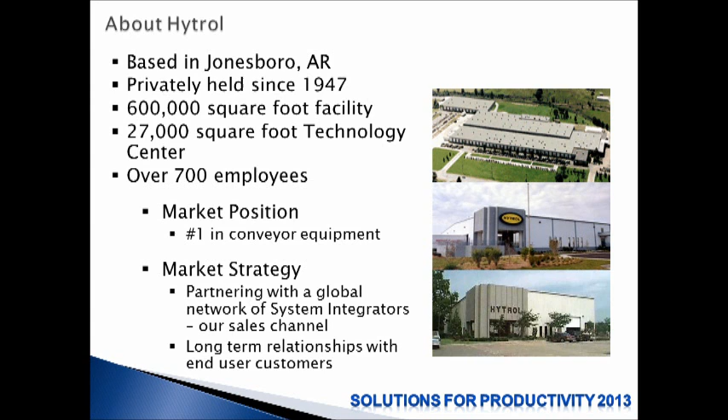And just a little bit about Hytrol Conveyor Company. I've been with Hytrol for 28 years, and we're actually the largest conveyor manufacturer in North America. We're located in Northeast Arkansas. We're actually number one as far as the amount of conveyor equipment that we manufacture. And we go to market through partnering with integration partners throughout the world. And obviously McCombs-Wall is our integration partner in this area. And we do have long-term relationships with end users.

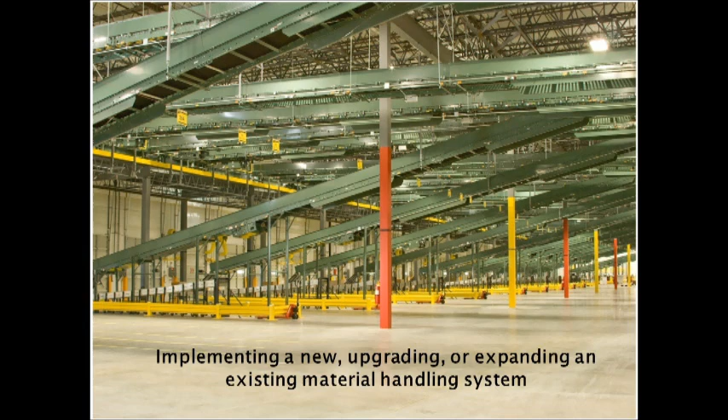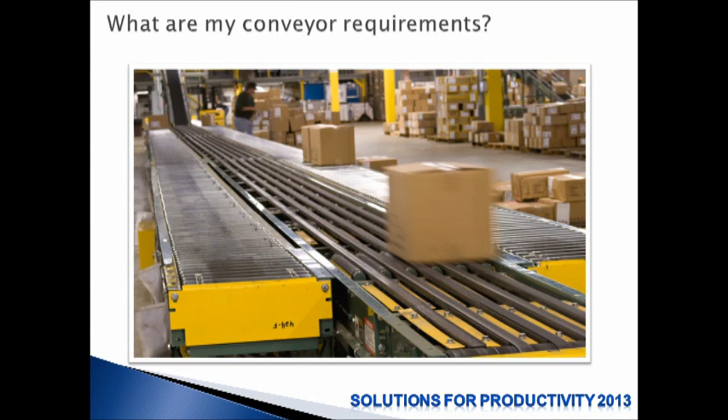Now what we're going to be talking about today should apply to you, whether you are implementing new equipment, new automation, new conveyor, or whether you're upgrading or expanding existing equipment in your facility. What are some of the things that we should consider when purchasing conveyor? And what are my long-term costs of operating and maintaining that equipment? We're going to be talking about that today, and also what can I do to control some of those costs through the technologies that are available out there today.

A lot of times when people go into an investment, they go into it with sort of a limited vision as far as what their costs are going to be. And a lot of times there's actually more cost associated with a piece of equipment than just the initial investment. There's the long-term cost of operating and maintaining that equipment also. I break down the total cost of ownership as being obviously your initial investment that you've got to make, but then there's operational cost, there's maintenance cost, and with all of that, there's a useful life expectancy of that equipment that's got to be factored into the equation.

And what we look at is the initial investment plus your operational cost plus your maintenance cost, but you got to look at the useful life of that also, because sometimes you can invest another 3 or 4% in your initial investment and your useful life may be doubled. So you got to take that in consideration. How long is this equipment going to be effective in supporting my business? That's a major factor. Not just the life of the equipment from a mechanical standpoint, but is it going to serve the needs of my business and the growth that my business expects to have over the next few years?

So if you look at initial cost, typically that's going to be your equipment, your controls, your installation. The operational cost, your electrical usage, and if there's pneumatics associated with that, compressed air, that costs money. And also the maintenance cost. Maintenance cost consists of your spare parts to support the system, any replacement parts throughout the life of the system, and then the labor that's going to be put into maintaining that equipment.

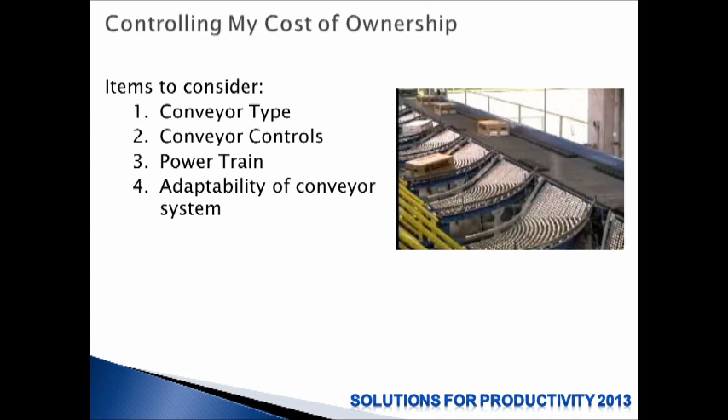So let's talk about the things that we're going to discuss today as far as controlling those costs. Choosing the right type of conveyor; your controls can have an impact on that. The powertrain itself and the efficiency level of that powertrain we're going to talk about today. And then the adaptability of that conveyor to meet the changes that you expect to have, or maybe don't even expect to have, in your business. Does it have the flexibility and adaptability as your business changes? And then useful life.

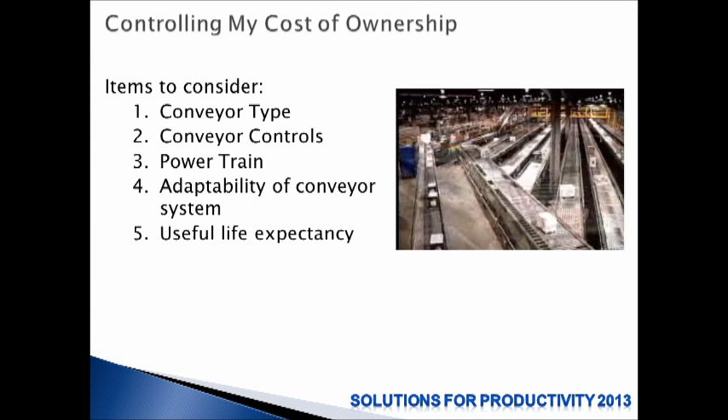All right, so let's start off talking about the conveyor type that's chosen itself. Contrary to some people's belief, all conveyors are not created equal. There's different types of conveyor, different types of technology, and they're all useful, but they're useful in different applications. So you've got to make sure you pick the right type of conveyor to fit your particular application.

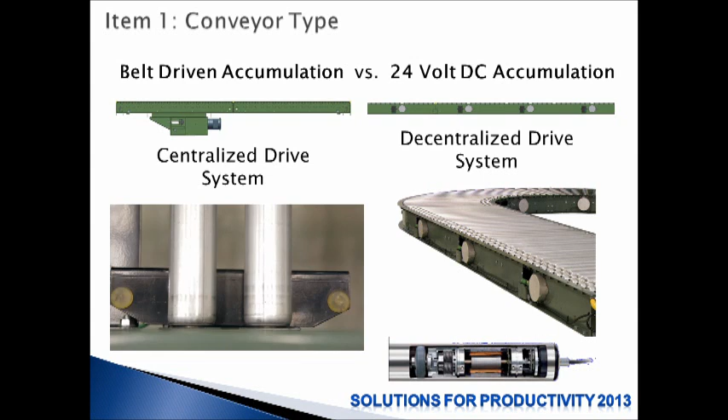So if we compare the cost of these, if you look at a centralized drive system, typically we see this as a lower initial equipment cost, but a lot of times the cost of supporting it from an installation, operation, and maintenance may be a little higher than the one on the right. The one on the right, in many cases, you may have a little bit more initial investment, but you save in installation, and sometimes that offsets that higher initial equipment cost. Plus, a lot of times it has a lower operational cost and lower maintenance cost, and we'll talk about some of those reasons why.

Down in our booth, we have a piece of what we call E24, 24-volt driven conveyor, but when the zone stops, you stop all energy consumption. Whereas with a centralized drive system, a belt's driving the rollers; even if the roller stops, the belts are still running, so you're still consuming power.

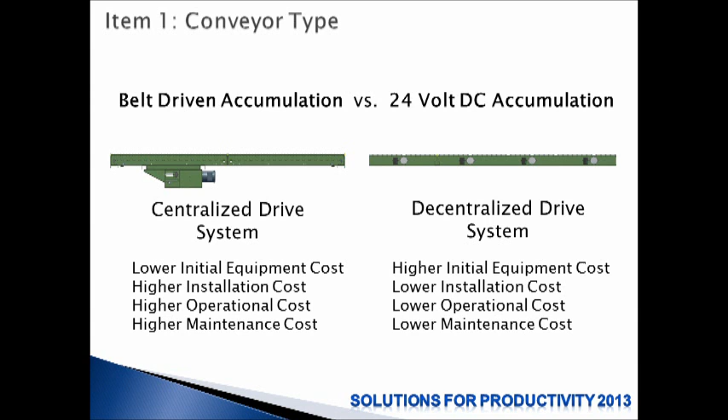But with the one on the right, if you've got a particular peak time during the day when a lot of your product's going through, you size your speed and everything to accommodate that. And during the slower periods throughout the day, those motors are going to be stopping, and you're not going to be using power during that time. So you're only using power when you're driving and moving product.

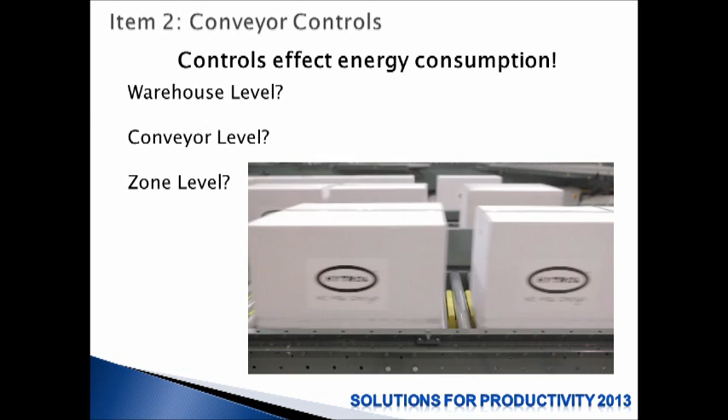The next thing we want to talk about is the controls. The conveyor controls can have a lot to do with how much energy you consume and how much operational costs. If we can shut the conveyor down when it's not being used, you're going to save energy in operating it, and you're also going to save in maintenance costs associated with that conveyor operating. So there's different levels of conveyor control. There's the warehouse level, the conveyor level, and then a zone level. For time's sake, we're going to focus on the conveyor level and the zone level.

And what we mean by that: zones, a sleep feature. We hear of conveyors going to sleep. They shut down when product's not moving. You can do that in the zones if it's an accumulating conveyor and you've got accumulation zones that may be 12 inches to 36 inches in length, depending on your product size. When product's not flowing through, that zone can shut down. So it's saving energy, saving power consumption, saving wear on the conveyor.

So that's a zone level. And then you can have a conveyor level where there's a whole conveyor in a pick module, say, or something, and maybe no picking's taking place in that area, no flows going through during this time of the day, and that area detects that, and it shuts the whole conveyor down, saving power.

And then another thing that's driving today and really being influential in saving energy and wear and operational cost is adjusting the speeds based on the need. You know, maybe you're designing this system to meet your throughput demands for 5 years down the road. But you know, today I don't really need it to run that fast. Through variable frequency drives, through speed changes, you can design it to run what you're going to need in 5 years, but running at a slower speed today can save a lot of cost in operating that equipment.

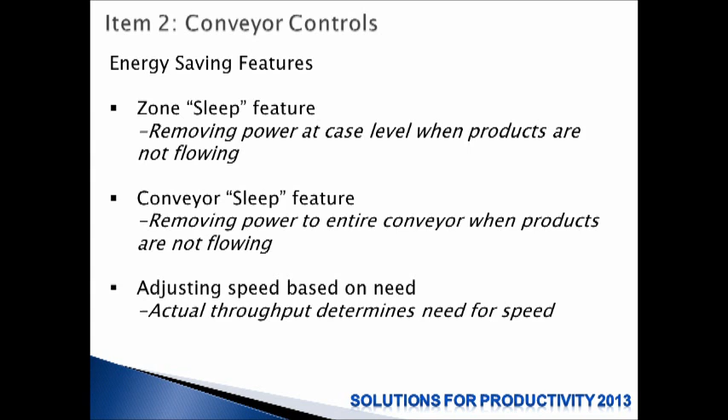Okay, an example of the sleep feature for a zone level and what that can mean to you in energy cost. All right, if it's a belt-driven live roller conveyor, your belt's going to be driving all the time. You're going to stop rollers in zones where product's not flowing, so you're not going to save a lot of energy in doing that because your main drive is still going to be running. So you may only save 10 or 15% in the actual energy cost because it's not going to be loaded as much.

However, with a 24-volt conveyor, if there's times when you're not needing to flow a lot of product, the zones can go to sleep. With a 24-volt decentralized drive system, you're actually shutting power totally off to that zone level. So, your energy savings is directly proportional to how many zones have been shut off. So there can be a tremendous savings in power during that time.

So, if I've got a system that, 1 or 2 hours in a day or half of the day, I'm going to be seeing my highest throughput demands, and I've got to have my conveyor designed for that time. But to say the other half of the day, I may be only running 25% of my throughput, and if I've got a 24-volt system during that time, wow, all of my zones are shut off, and that can be a huge savings for the energy.

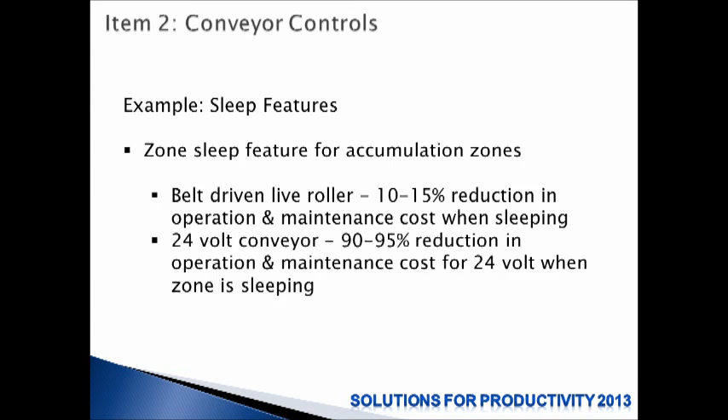All right, from a conveyor level, this is an example of a project we did for a major book company up in the Northeast, and this had several benefits from shutting the conveyors down in certain pick zones. This particular system is a large distribution building, and when they started up, it took them about 6 months to really get full utilization of this conveyor because they just didn't have all the inventory put into here.

So during this time, everybody's seen in warehouses where the lighting maybe shuts down when there's no activity in the zone and somebody walks into it, the lights come on. That's the way this system was designed from a control standpoint. When there was no activity in that pick zone, the conveyor in that pick zone shuts off. So tremendous savings in energy, but it's a lot of savings in maintenance.

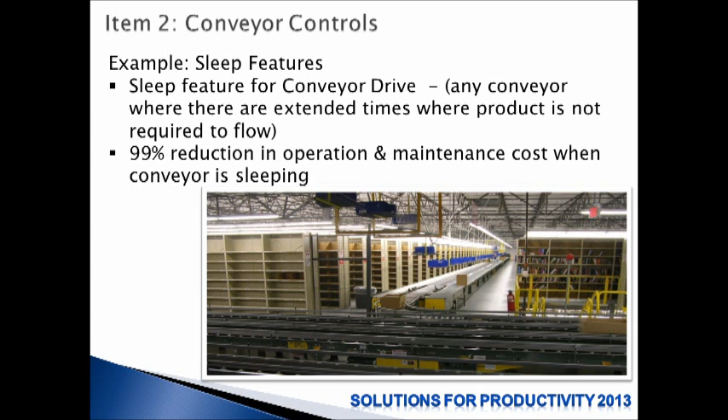And for example, the first 6 months when they didn't even have everything up and operating, there was a lot of time, a lot of energy saved and a lot of maintenance saved in not operating those pick zones where there wasn't inventory and not a high demand of picking. So that can save a lot.

Let's talk about the powertrain itself. I think there's lots of opportunities here. I like to focus on the efficiency level, and if you think about the maintenance, most of your maintenance to a piece of equipment is in the drivetrain. And there's some new things out today that can really save in the maintenance costs associated with the drivetrain, but also the energy used by the drivetrain.

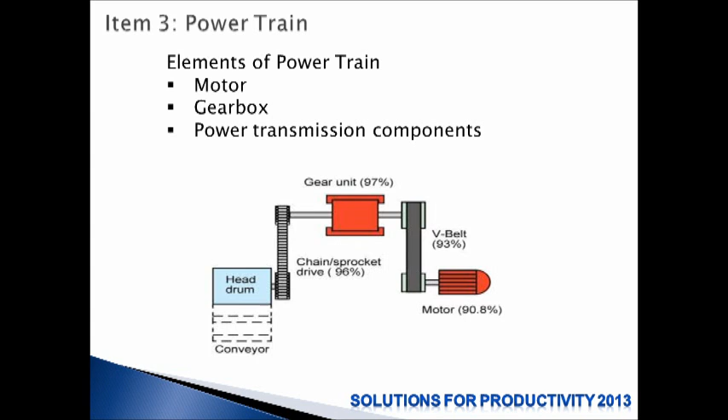I think of the drivetrain as basically being the motor, some type of gearbox to cut it down to the speed you need, and then you typically got some kind of chain and sprockets or belts that transmit the power to the belts itself.

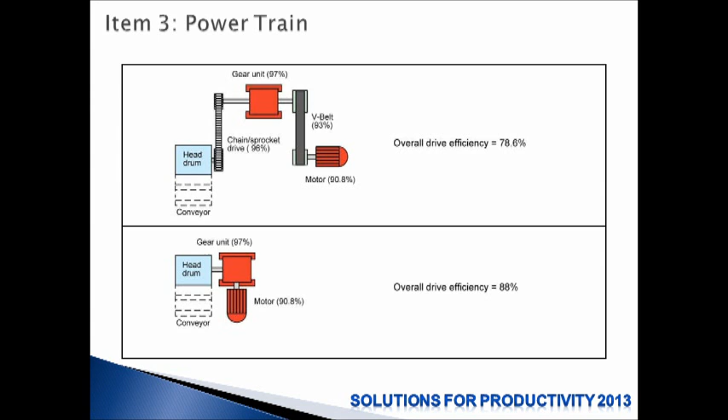Well, I'll get to the chain part in just a minute, but from a motor aspect, in years past, and even still in some manufacturers, they're still using standard efficiency motors. Just going from a standard efficiency motor to an energy efficient motor can save you 3% of your energy consumption. That's pretty big. Then you can go to super efficiency and gain another 3%. Something a lot of people don't know is along with saving the power, you're actually getting a longer life motor also.

And you're saving heat. A higher efficiency motor is going to take the power and turn more of it into torque rather than heat. Heat's one of the biggest things that cause motor issues and motor damage. So just moving from standard efficient to energy efficient, 3% energy, on over to super efficient, 3%.

I know we as a Hytrol conveyor company, a few years ago, went to a standard energy efficient motor as standard, so there wasn't any upcharge to go to that, because that's what we felt like the customer was needing. So along with energy efficiency, you're getting an increased life expectancy of that motor, and you're also getting a longer warranty on that motor. So that's a nice feature about going to higher efficiency motors also.

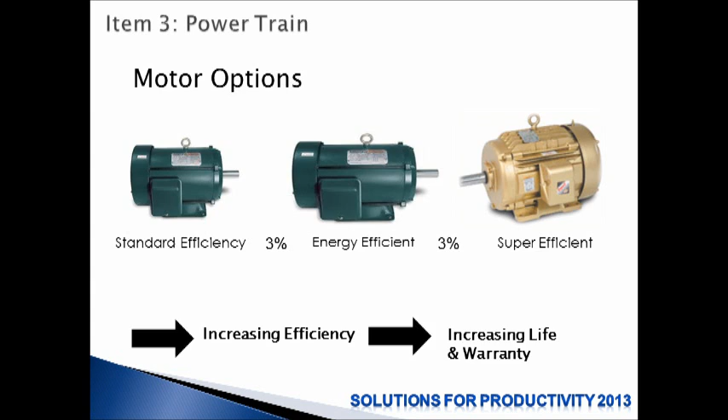The next item is the gearbox itself. There's lots of different types of gearing. The two most popular types of gearing used in the conveyor world are either a worm style gearing or the helical bevel type gearing. The worm type gearing varies a lot in efficiency, from 60 to 90% typically, where with the helical bevel it may be a lot closer to 100%, say 97, 98% efficient.

That's all good. And increasing the efficiency of the gearing is not always directly proportional to your energy savings. With a motor it is. You have a 3% more efficient motor, you're going to have 3% energy savings in your electrical cost. But going from, say, a 90% efficient worm gear to a 97% efficient helical bevel gear does not necessarily mean that you're going to save 7% in your energy cost. And let me explain why.

With typically the lower horsepower motors, 1, 2, 3 horse motors used in the conveyor world, the most energy is consumed in just energizing the windings of the motor. So if I take a 2 horse motor, set it on the shelf and run it unloaded, it's going to pull about the same amount of energy as if I ran it under full load. So unless going to a higher efficiency gearing allows me to drop in horsepower size, I really haven't saved any significant energy. So my best bang for my buck is to put my money into a higher efficient motor, not necessarily into higher efficient gearing, okay?

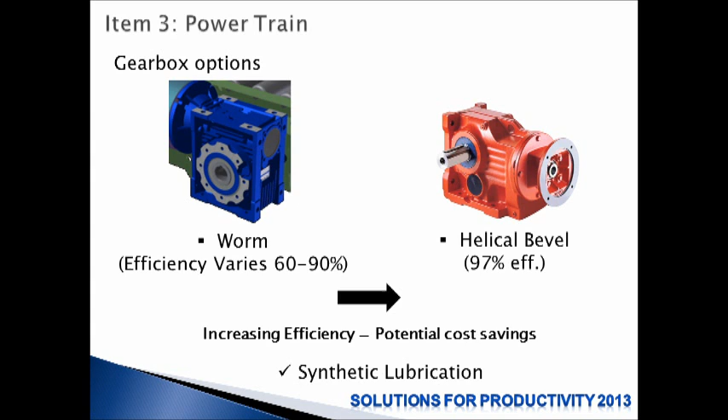Now, going to some higher efficient gearing can sometimes possibly lengthen the life of the gearing. So I'm not opposed to going to higher efficiency gearing, but if you're going to spend money, spend it on the motor, not the gearing. Synthetic lubrication is definitely a help. That allows any box to operate at a higher efficiency level and longer life, and you're eliminating having to change the lube out, so you're going to save some maintenance costs.

Let's talk about the chain and sprocket. How many in here have got a conveyor that's got chain and sprockets operating on it? Anybody in here got any conveyor? Anybody in here that doesn't have any conveyor needs conveyor? That's more important.

All right, so there's a few different ways to do that. Typically, chain and sprockets are the popular way that conveyors are driven. There's ways to eliminate or cut down on the maintenance cost of chain and sprockets. Chain and sprockets are really the item on a conveyor that needs the most frequent maintenance, in lubing the chain.

That's really your highest maintenance item on a typical conveyor. That's got to be done on a most frequent basis, a chain sprocket. You can go with O-ring chain. O-ring chain has sealed lubrication in the chain and can cut down tremendously on the amount of lubrication that you have to do, the time-consuming lubrication. So going to O-ring chains is one step you can go to.

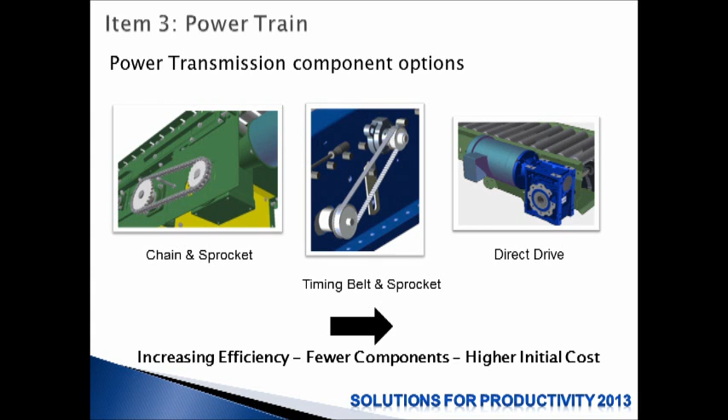The next step you can go to is totally eliminate it by going to timing belt drives. But the best way to totally eliminate that is going to a direct drive. Anytime you can go from a chain sprocket over to a direct drive, you're saving maintenance costs and you're increasing the efficiency of your drive too. So, increasing efficiency, fewer components, and typically a higher initial cost is associated with moving from chain sprockets over to direct drive.

However, this is something that we're really excited about. We're just introducing this product in June of this year, and that's what we're calling a unified drive system. The unified drive system is a direct drive system using a worm-style reducer that is high efficient. It's got a synthetic lubrication in it, and it's a long-life sealed reducer, so there's really no maintenance associated with it because it's a sealed component, synthetic lubricant, no maintenance required to this particular gearbox, and it allows the elimination of the chain and sprockets.

Where going to a shaft-mounted direct drive system used to cost an end user around $1,500, this is about a tenth of that to go to this style drive. So we feel like this is going to really help allow the end user to cost justify eliminating chain and sprockets. Going from chain and sprockets to this style drive, it's going to add most of the time less than 1% to the cost of the equipment, which is a pretty new thing. It's a really new thing that we're excited about in center drives as well as end drives.

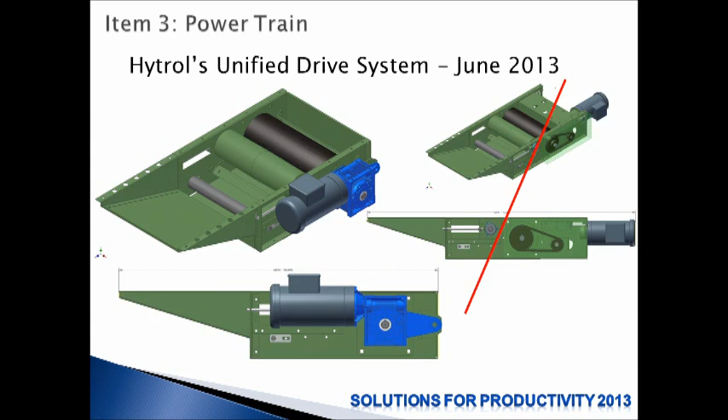And you can just see you're eliminating chain and sprockets, eliminating the chain guard that's got to be maintained and kept in place, going to a direct drive, but it also eliminates the elevation and the space required for a chain style drive. Probably if I walk through a manufacturing facility or a distribution center, a lot of times the thing that I see that's gone unnoticed is chain rubbing on a chain guard or something. This is a big factor in eliminating that, which is a big plus.

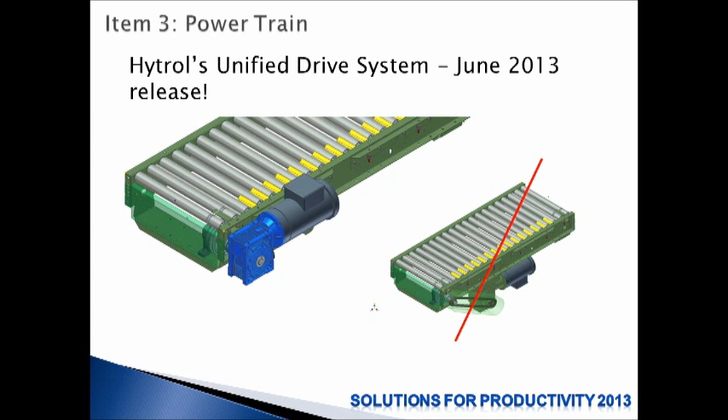And even in some cases, like this roller conveyor, going from a chain sprocket application to a direct drive is actually going to cost the end user $0. This is a big thing that Hytrol is going to market with, because nobody that I know of in the industry has been able to go from chain sprockets to direct drive at no additional cost. And that's what we're introducing in June.

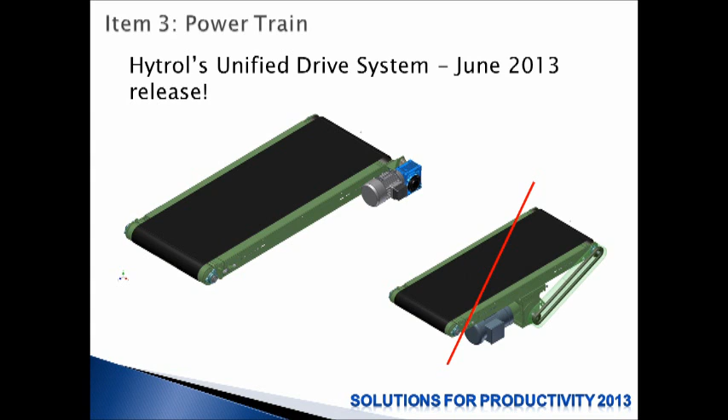So what are the benefits of going to a unified drive like we're talking about here? We've almost eliminated, in some cases have eliminated, the additional initial cost that you've known in the past. And at the same time, we've eliminated the drive chains, the maintenance associated with that, and lubrication, alignment, and tensioning, all that goes along with that type of drive system. No chain guards, no maintenance reducer, no lube that has to be changed on a regular basis. It's quieter operating and fewer spare components. So this is big.

If you go back and remember the diagram I showed you where you have an initial cost, and then you have a maintenance cost and an operational cost that build on one another. What we're looking to do is find ways where there's no additional initial cost, but yet it's still lowering the maintenance cost and operational cost. I think that's the key of the game. That's when we can take the justification to a no-brainer, where the ROI is easily justified. And in some cases, no additional cost to be justified. It's just lowering maintenance and operational cost.

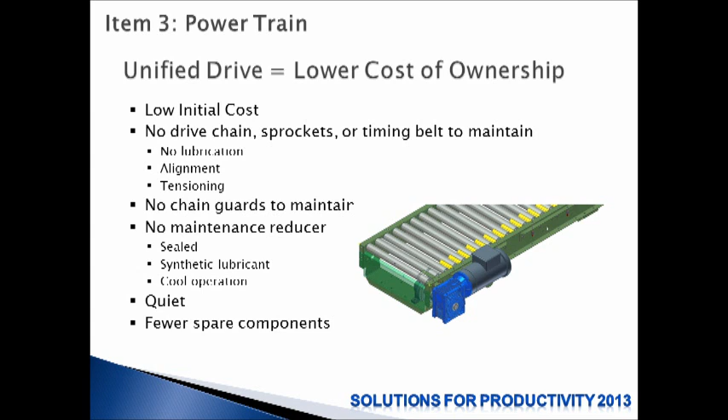Adaptability of a system. That's an important factor if you're going to be buying equipment, buying conveyor. You've got to think about the flexibility because businesses change. They're changing rapidly. Your volume, your products are changing. You've got to consider how flexible your system is to be able to change with your business. Product size changes. We all know that's a big factor that we've watched over the last 3 or 4 years. Product sizes are dramatically decreasing because of a lot of direct-to-consumer business.

And throughput changes because, you know, it's hard to predict what my business is going to need throughput-wise 5 years down the road. I got to make sure I'm investing in equipment that can adapt to those changing needs. Can your conveyor system be configured on demand to meet those changing requirements?

So, you know, the product sizes change. Some of the things that we've incorporated into our equipment is the ability to change the zone length. It used to be, if it's an accumulating conveyor, we had to size the zone length to fit a product size. Today, through our control system, EZLogic, it can measure the length of the product and assign the appropriate number of zones to that.

So if I bought a system, say 10 years ago, designed for my 24-inch long cartons, and 3 years down the road my maximum carton size changes to 3 feet, I'm not going to operate a system very well because I didn't design it for that 3-foot long carton. Today, conveyors are intelligent enough to see my carton size, assign the correct number of zones to that carton, and it doesn't lose efficiency or effectiveness in conveying the product.

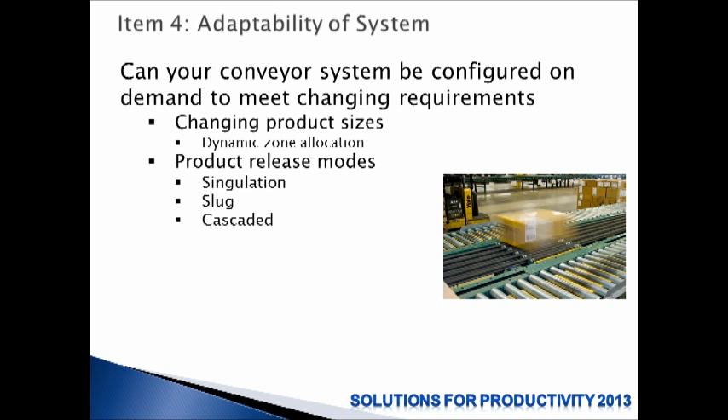Different release modes are available today so that, if I put in a system today that's going to be handling 30 cartons a minute, and 3 years from now I need to be handling 60 cartons a minute, I can change to a different release mode in many cases and be able to handle that higher throughput on the same conveyor, even in some cases at the same speed.

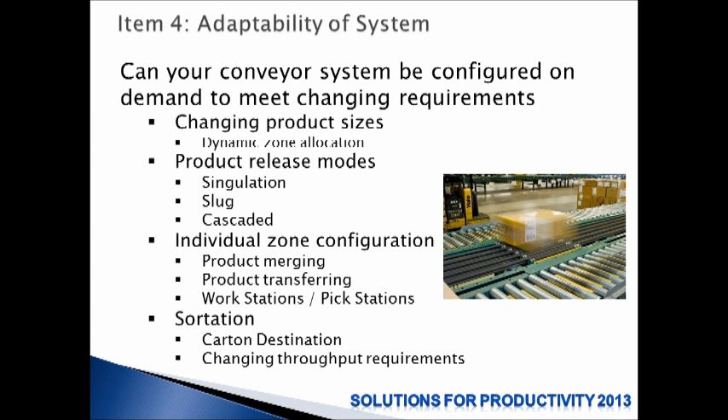And also the ability to change carton destinations and sortation, changing throughput requirements. All of our sortation equipment has variable frequency drives in it for that very reason. I don't want to run my conveyor today, in sorting my products, at the speed that I need for my 5-year plan. I want to run it at the speed that I need for my demand today, saving energy, saving wear and tear on my equipment, and therefore saving maintenance costs.

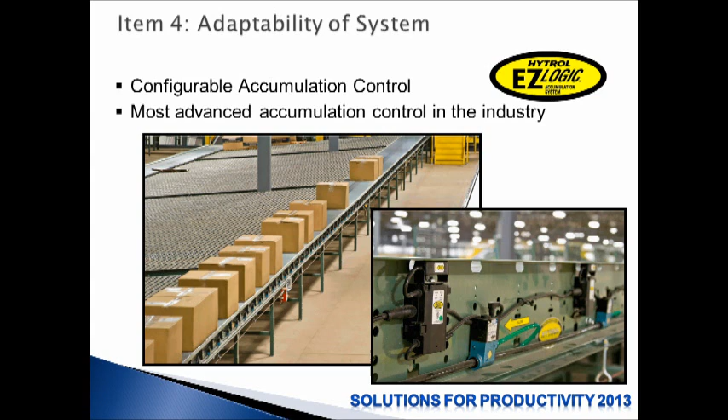So configurable accumulation control, this is something that we introduced a number of years ago through our EZLogic control system. The intelligence is built into the photo eye itself, and it can be configured through a PC so that we can change the timers on it, we can change the throughput on it, a lot of times even keeping the speed the same. So it allows an intelligent, configurable control to adapt to my changing product sizes and changing product throughput.

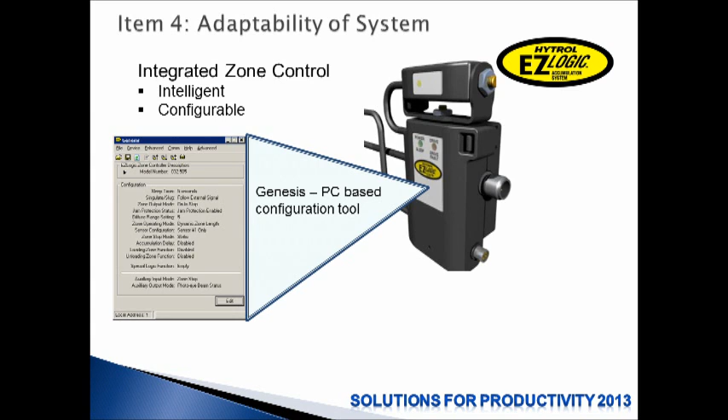So the innovation of today's conveyor is driving the throughput while keeping the speeds lower. You don't see as much empty space on conveyors today. Some of y'all maybe saw some of the videos this morning of some of the jobs that we've done with McCombs-Wall, and you see cartons with not much gap between them. Gap drives the speed higher, and it's just wasting energy.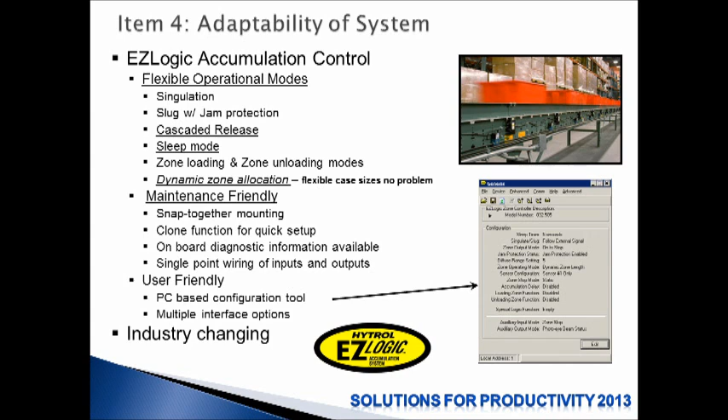How long will my system last? Useful life, that's a big factor. Not only how long the design life of the equipment itself is, but also how long is it going to be useful to my business? Can it grow to adapt to my increasing needs? So reliability, that's important. Reliability of components. It's okay to ask up front, what is the design life of this piece of equipment? That's an okay question to ask. You ought to be asking that kind of question.

What about the manufacturer support? Am I going to have availability of parts? I've seen equipment obsoleted because the company I bought it from was no longer in business. I could no longer get spare parts. I could no longer get replacement parts. So you got to make sure that, you know, what